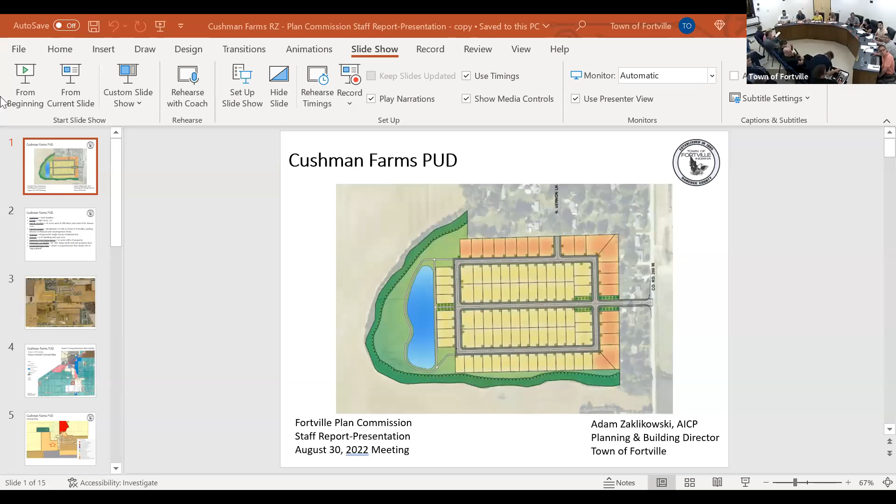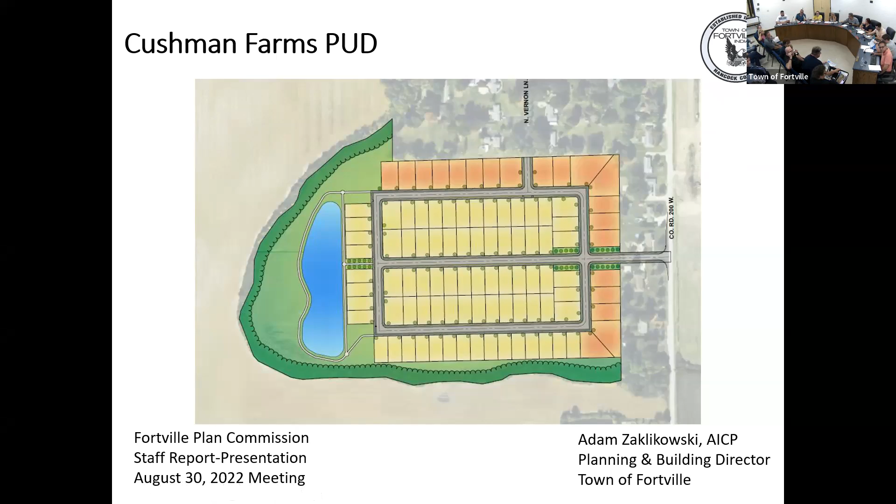So the first case here on tonight's agenda is one that was considered and continued from the last meeting. This is the Cushman Farms PUD. The applicant on this project is Pyatt Builders, and the owner of the property is E&P Farm LLC. It is about a 41-acre site west of 200 West and south of North Vernon Lane. The current zoning on the property is residential 3.5, and the developer is seeking to rezone it to planned unit development.

As an overview, the housing they're proposing would contain 97 single-family residential lots, amounting to about 2.37 dwelling units per acre in density. The common open space they're showing is about 12 acres, representing about 29% of the property. The minimum lot width would be 65 feet, but it would still be 80 feet along the north and east property line. The town's comprehensive plan does show this site as agricultural.

We'll go into some more of the development standards detailing what they're proposing. So here's the property here. You can see that it's basically being carved out from the larger Cushman property. It's just south of the Alford subdivision, west of 200 West, and west of the new Mount Vernon North subdivision. And then, of course, to the south is the Mount Vernon School District campus.

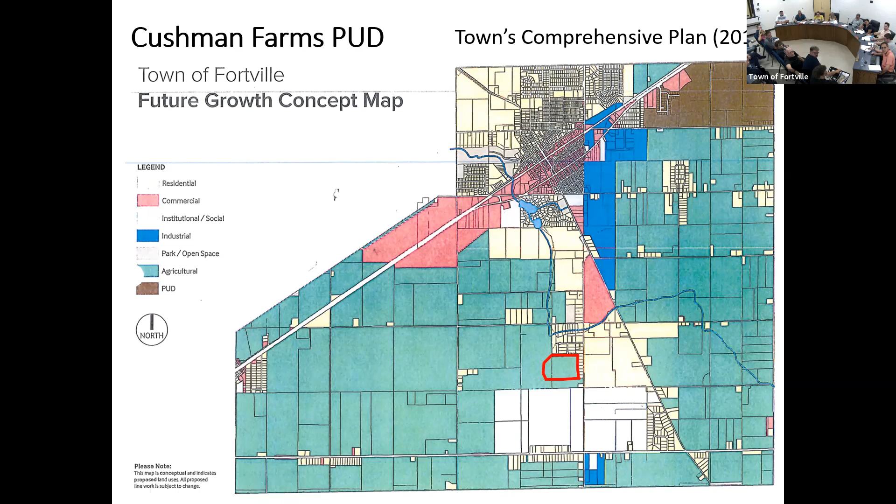If we take a look at the zoning map, you can see that the town limits in this area are a little bit odd, but this particular property is within the town limits. Anything within the black line means it's in town limits. So this property today, anything in that beige color is R3.5. Properties to the west are residential 1.0 in the county, as is the subdivision to the north and some of the lots along 200 West. The Mount Vernon North subdivision also has a county zoning with their own unique development standards.

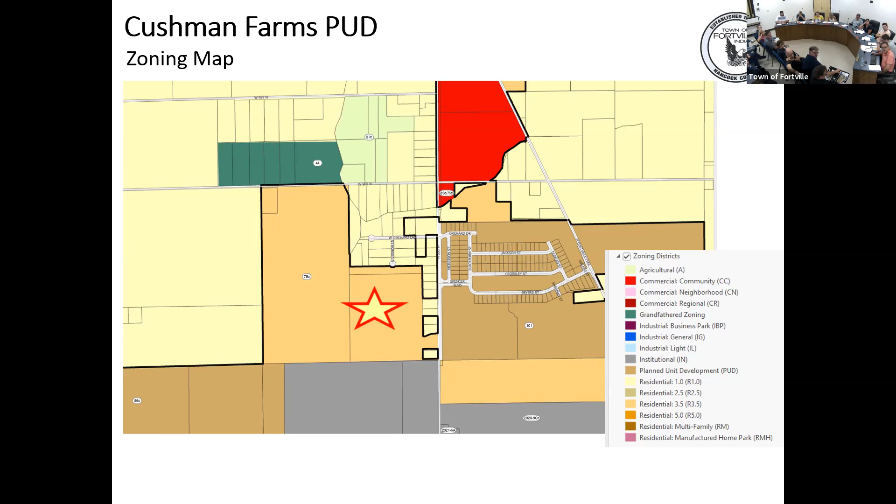If we take a look at the concept plan that is part of the PUD, you can see that the larger lots are on the boundary of the property in orange. Those are the 80-foot wide lots, and then the 65-foot wide lots are the yellow. You can always come back to this as necessary, of course.

Here's some of the concept renderings for the housing product that was intended in the subdivision. And we can always come back to these just to give you an overview of what they're looking to accomplish.

All right, so it should be stated that the developer has the right to develop the property under the basic R3.5 development standards and the subdivision control ordinance that's in place today. Essentially, in exchange for smaller lots, the developer is willing to commit to higher standards as part of the PUD zoning. Some standards agreed to by the developer are likely the most detailed and stringent standards in the Indianapolis metropolitan area, and I think the developer can attest to that.

The project is based on the town's PUD standards template. That template was developed by a committee of town council members, residents, and staff. It was adopted by the council via ordinance in 2017. Select alternatives to the standards outlined in that document may be considered by the Fortville Town Council, but in no way should the resulting development be of a lesser quality than intended in the outline.

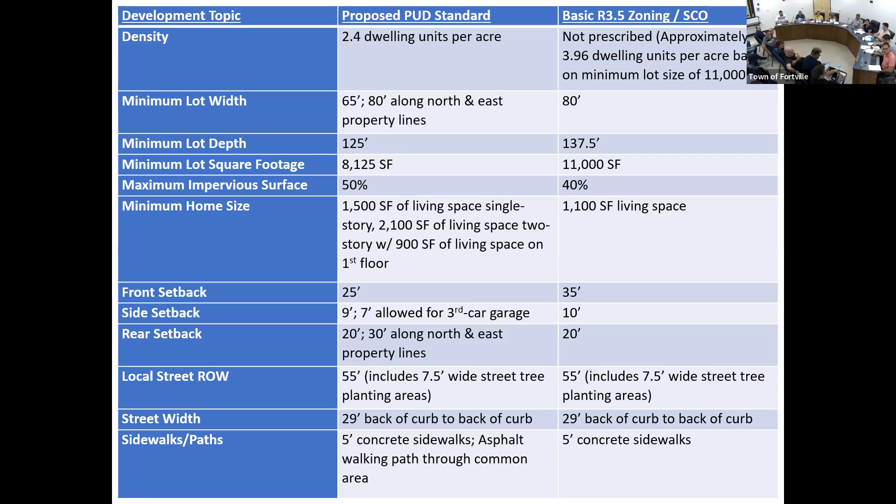In terms of the garage requirement, the proposed PUD standard is that a 2-car garage with windows cannot exceed 50% of the front elevation, and this 50% rule does not apply to 3-car garages. In the standard zoning ordinance, it's also a 2-car garage with windows, but garages cannot exceed 50% of the front elevation, period — with no exception for 3-car garages.

In terms of exterior materials, they are proposing to prohibit vinyl siding, which is allowed in R 3.5. They are also looking to require frieze boards along the soffits and 3-foot masonry on corner lots if masonry is used on the front. As it relates to R 3.5, there's no requirement for frieze boards, and no corner lot masonry is required. It does say that 50% masonry is required on the front elevation unless an architectural style is utilized where masonry is not typically used.

For the exterior window trim and overhangs, they'll do 1x6 trim instead of 1x4, and they would be providing a 12-inch roof overhang, which is greater than the 9-inch roof overhang that's otherwise allowed. Architecturally appropriate shutters would be required in this project, but they're not required by the zoning ordinance.

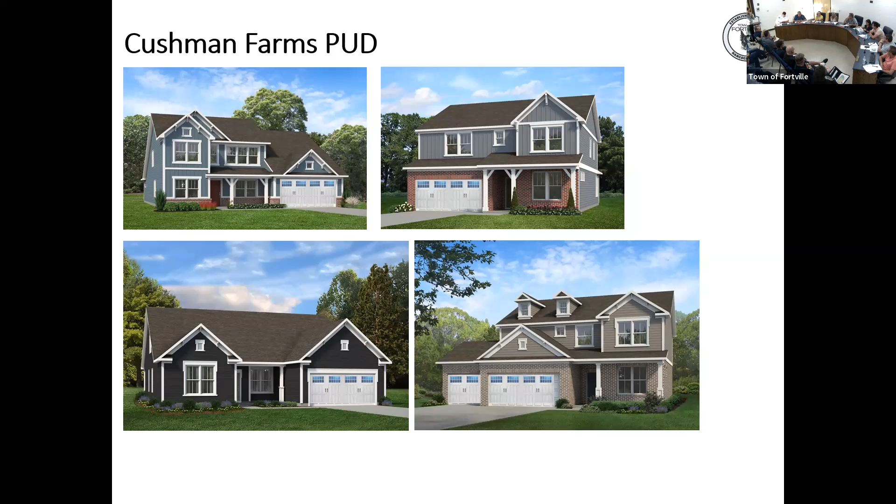The buffer for the north and the west or the east, are these landscape buffers that have any height, or is it just ground level? I tend not to want to do mounding in those locations because it creates drainage issues for them as well as us, so I tend to use soft landscaping, which is trees and shrubs and so on.

I have one more. So when you had the survey done, that lane or that parcel that goes back in there, you said it's 50 foot, is that what the survey came up with? Survey shows that, and on the paperwork it looks like you need 55. How are you going to propose to make up the 5 foot difference?

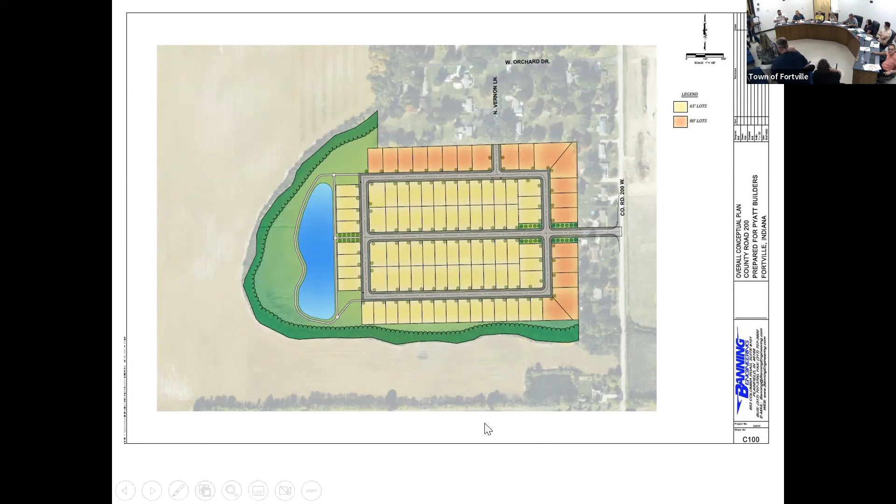As we move forward, we'll move to new business, which is the public hearing for case number 04 SPP 2022, the Mount Vernon master plan.

All right. So for the next and last case today is the Mount Vernon School Campus Master Plan.

The applicant, Mount Vernon Community School Corporation, is seeking concept site plan approval and related plans for a campus master plan for improvements on their property east of 200 West and north of State Route 234. This $84 million project has been reviewed by the school board and is part of an overall growth plan prepared by the school district to meet the needs of a growing student body.

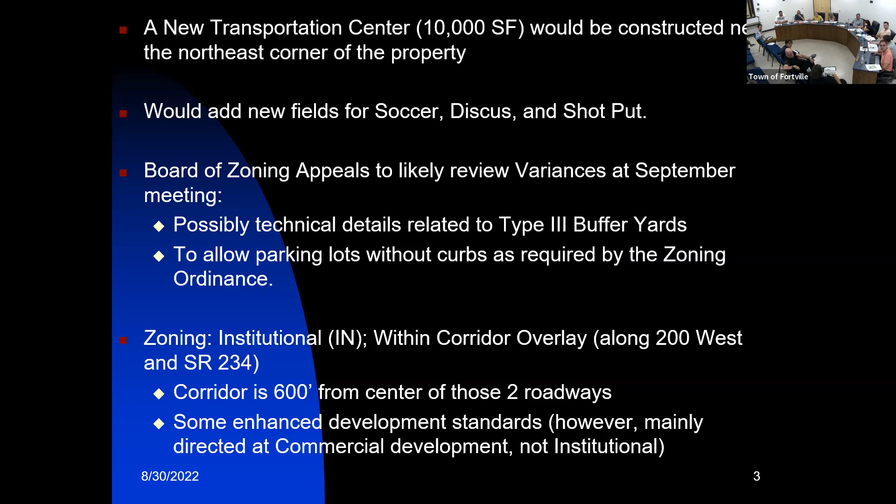If we take a look at the zoning map, that's all been updated to reflect those changes in zoning. Everything in gray is institutional. To the north, there's more land zoned residential 3.5. Off to the east is the Mount Vernon Point subdivision, zoned residential 1.0 and unincorporated Hancock County. Off to the south, on the south side of 234, there's some agriculturally zoned properties, also unincorporated Hancock County.

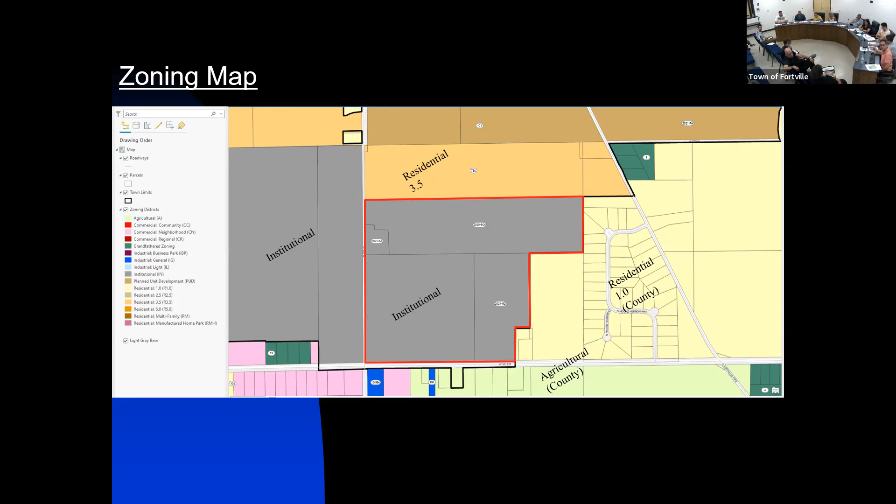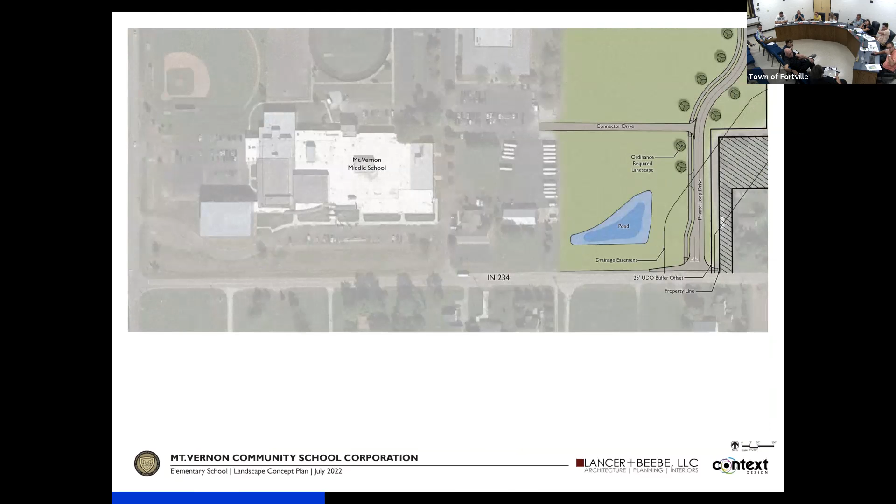This particular exhibit is showing the southeast portion of the property where the entrance is being proposed along State Route 234. And then here you can see some modifications would be made to the bus parking area north of the middle school.

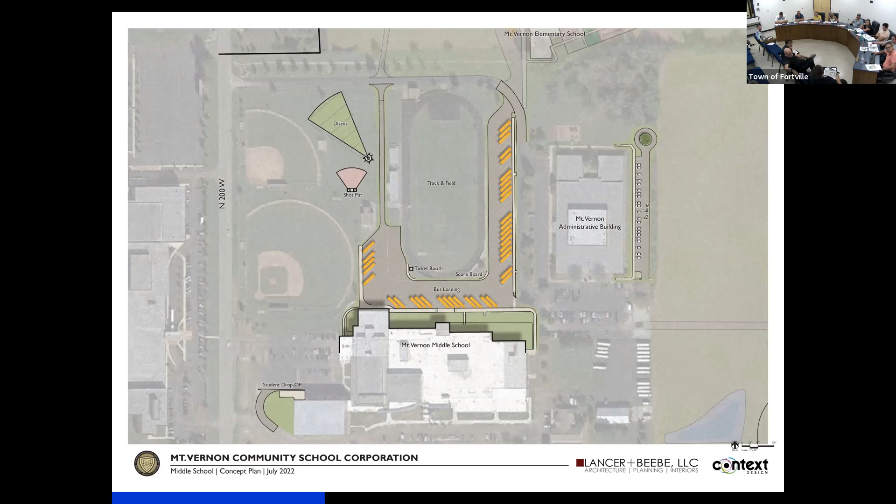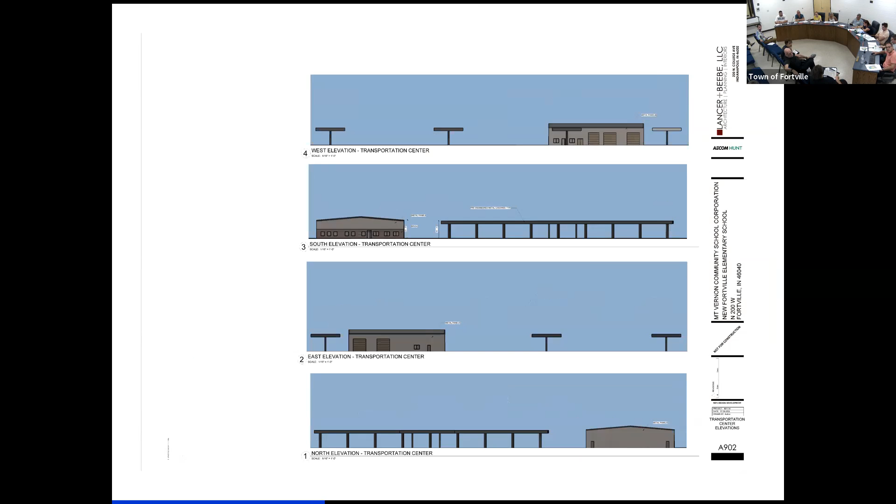Here are some of the concept building elevations for the new elementary school, and then here are some elevations for the new transportation center, along with some other renderings of the elementary school.

In terms of the concept lighting, which is the purview of this body, they're simply showing LED lights, parking lot lights, fully shielded.

So these are typical review items on the concept site plan for the zoning ordinance. At this point, we'll detail this below, and note the full construction plans would be reviewed by staff and the technical review committee as well.

In terms of access, as I mentioned, that private loop drive is intended to be constructed, so there would be access via 200 West and State Road 234. The driveway on 200 West aligns with the newly installed driveway to the intermediate school, which is the current elementary. New driveways have appropriate distance from the intersection of State Road 234 and 200 West, as far away as possible from those intersections. The driveway near the new elementary school has a long queuing lane to remove car line traffic away from the loop road and the arterial.

In terms of the setbacks that would affect this area, on the north edge of the property, that'd be considered a side setback. For the zoning ordinance and institutional zoning, they have to have a 25-foot building setback, plus a 25-foot buffer yard, type 3 buffer yard - more detail on that momentarily. So it has to be a 50-foot setback.

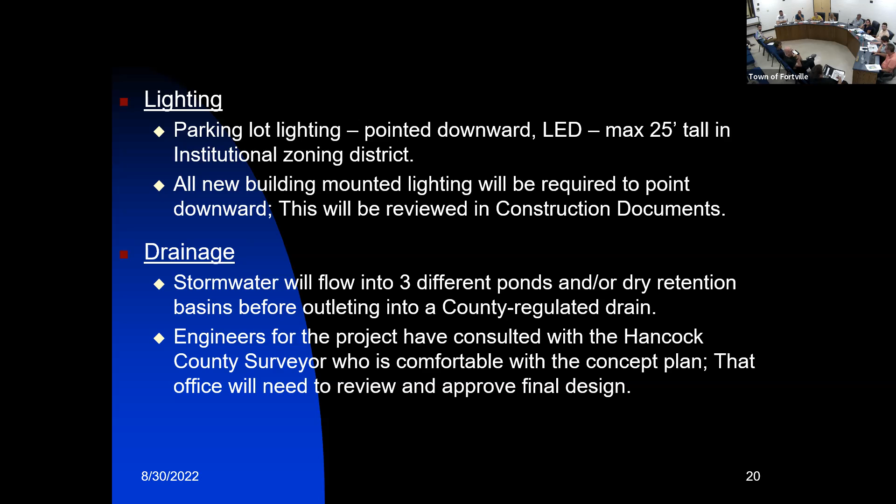In terms of architecture, I have the drawing up there. It is mostly a brick facade for the new elementary school. The peak of the roof is under the maximum height requirement for IN zoning of 50 feet. We verify that on the construction plans.

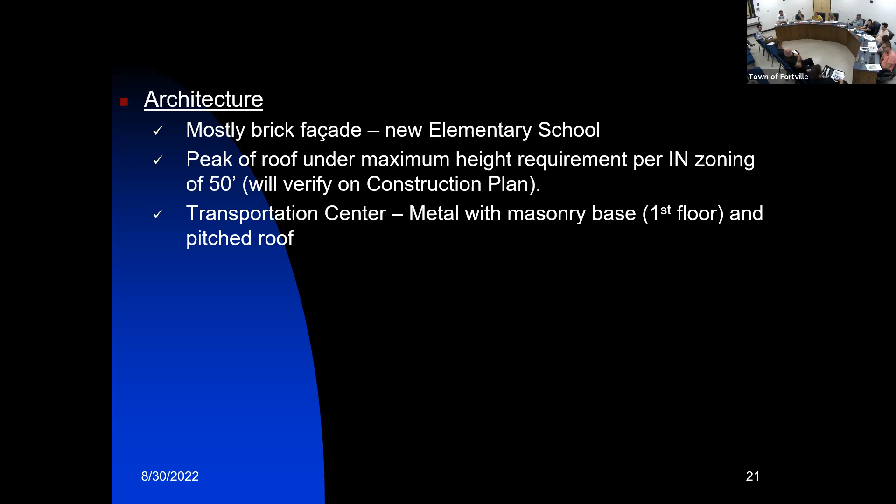The transportation center is a metal building with a masonry base on the first floor, and it would have a pitched roof, so that would meet the architectural standards of that zoning district.

In terms of the community response to the project, the remonstrance, we're not aware of any known remonstrance. However, public hearing notification items were completed and they exceeded the requirements, as they did in the last case as well.

We needed to include all the owners in Mount Vernon Point, plus all other residential owners in the Mount Vernon School campus. They did a newspaper publication as required, and a public hearing sign, as required.

We also had them include a rendering of the master plan, which went above and beyond the normal requirements under the law. So based on the analysis, my recommendation would be to approve the concept site plan, concept landscaping, and the concept building elevation. I know Dr. Parker is here with our design team.

So certainly if you have any questions, I'd be more than happy to address those, and also Dr. Parker will say a few words this evening. Thank you. Any questions, Brad, from the committee?

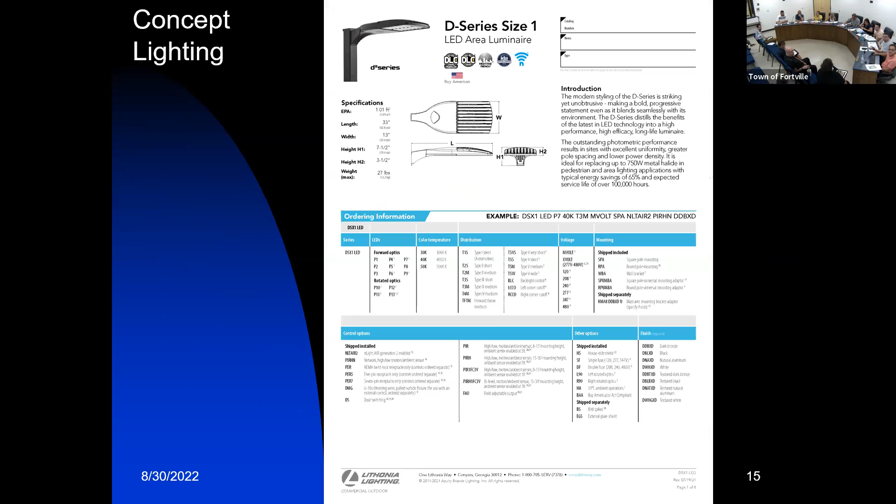I'm going to ask my regular scheduled traffic question, especially given the previous case. When it comes to traffic, has the traffic impact study been completed? I know that a lot of the detail potentially comes in the next step, but all I see are access points. I don't believe it has been provided, or I don't believe it's been completed. I guess that's why I asked.

I certainly wouldn't be opposed to requiring a traffic study or a simple traffic analysis if you felt more comfortable with that, given the size and scale of the project. But I think just knowing the existing stacking queue, you have to understand how this impacts things, and some of the drives are going to be on 234. So as part of the state review, I know we're going to require a traffic study, but it might make sense to just bundle it up and do it once.

Has Fortville PD offered any input as to how they're going to position themselves for traffic? We have, what am I saying, 1, 2, 3, 4, 5, 6 ingress/egress points here instead of what we had previously. And Dr. Parker, do we know what the release time would be on Mount Vernon Intermediate? Would it sync up with the elementary or the middle and high school?

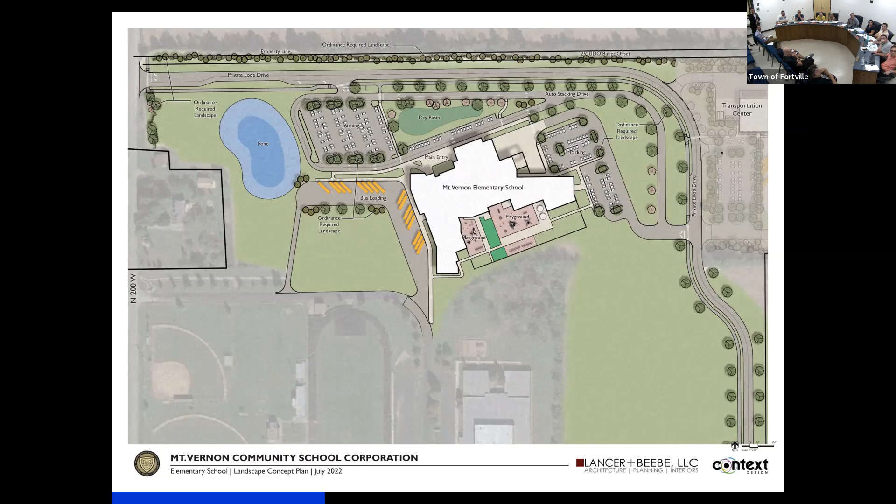We park some at Mount Comfort, some at McCordsville. They need to be parked and secured behind the fence. So we're likely not going to raze that old bus barn and build that parking lot or even that middle school soccer field until phase 2.

We will get started with phase 1, which is going to take us a couple of years to get that rolling. But we will do the whole loop road. We'll get that queue fixed for the middle school, and we will have a bus queue that goes all the way around the middle school football field, completely separate from any vehicles. It's going to be so much more efficient.

That's kind of the skinny part. I don't know if you want, are there any other features, Mr. Beebe or Mr. Wade, that we could share before they ask any more questions?

I think Adam covered most all of it. I mean, you did a really good job. And before I step away from the microphone, I will say that Adam and Joe have been involved in this for several months, guiding us and helping us along the way. We've had a lot of conversations and we appreciate the partnership.

We want to be good neighbors and we want to work well. I'll step back. Is the preschool still going to be in the Mount Vernon admin building in the middle of them? That is exactly the plan. The plan is to keep it there. My guess would be the board's going to consider making those facilities a little nicer for them in the next handful of years.

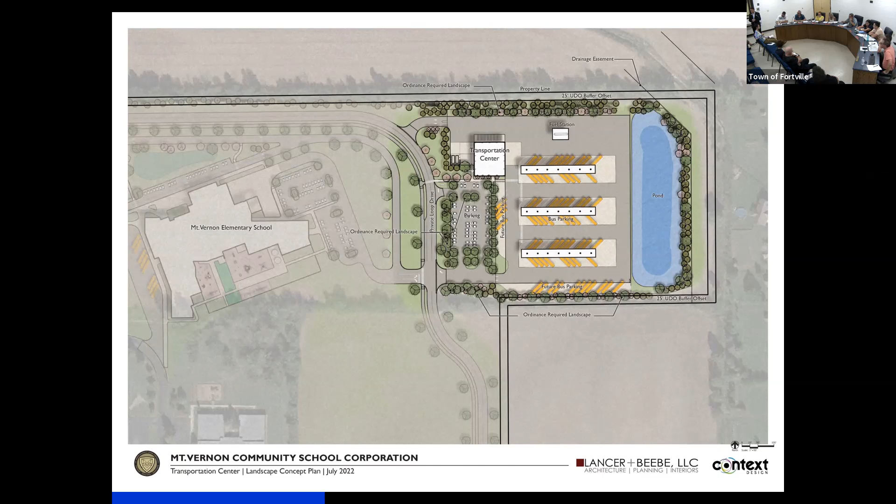We are hypersensitive to school safety, and I don't like having part of our property that is dark, because a lot of people like to be on our property at night for whatever reason. I know, but I don't want to look at a lit parking lot. I understand, but many of the lighting fixtures we use, especially in parking lots, do not have a lot of light pollution like the field would. Those are tempered quite a bit and don't shine a far distance like a football or soccer field does. I mean, I live a mile south and I always know the football field lights.

Well, yeah, and you're going to put some lights around the soccer field too, right? I don't know that we'll have lights around the soccer field. We might not use the middle school soccer field in the evening. It's just a middle school soccer field. The football lights were very bright when I lived nearby. Yeah, they are still bright. We understand, oh, it's not the park.

Is there any talk about, with all these different entrances along 200 West primarily, some signage to let people know, especially with the new developments coming in, where to turn to get to the various places they need to go?